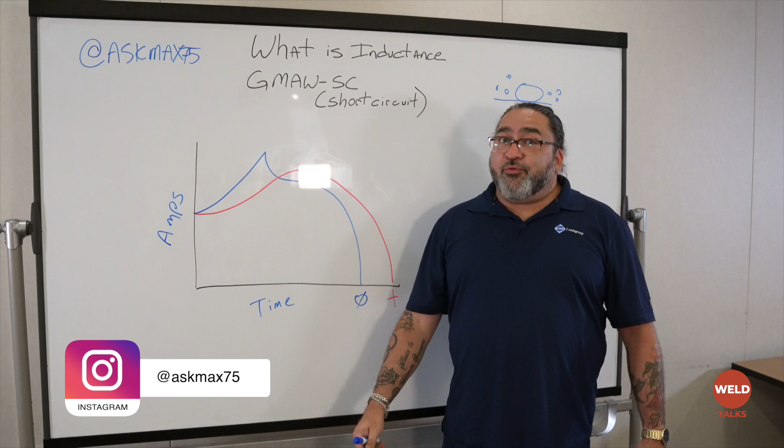We get questions here all the time, and one of the questions that we always get is, what is inductance? Now, inductance is a little dial on your machine that you may not know what it does, but it's important to really understand your machine for you, for your shop, and for your good welds.

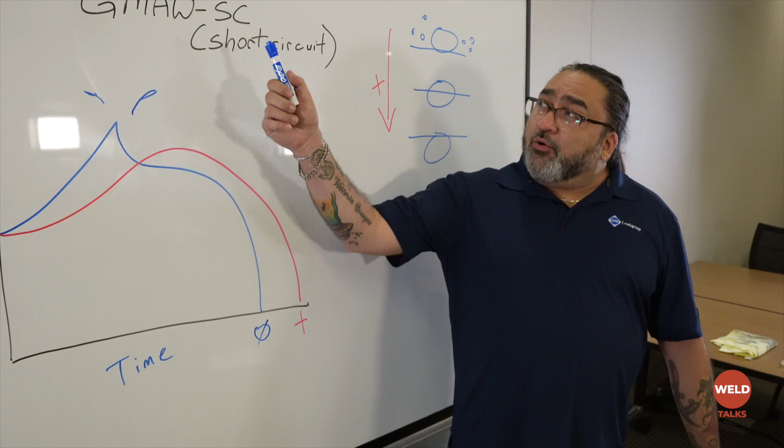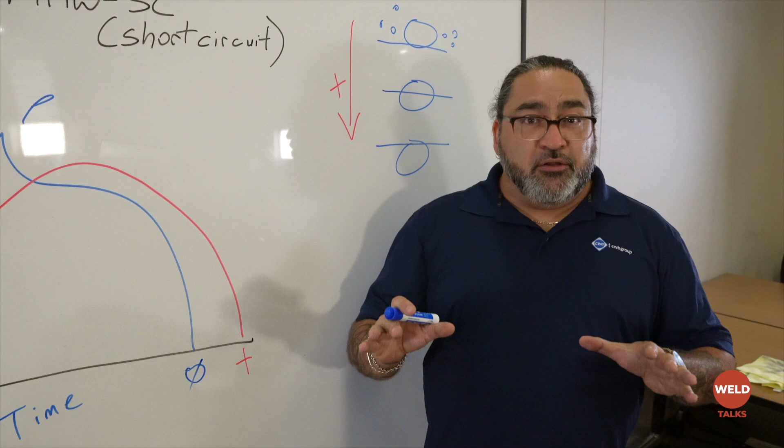Now, the important thing about inductance to know right off the top is that it only works with GMAW short circuit. So it doesn't work with globular or spray. It only works in the short circuit process, and that's when the wire is actually touching the plate, low voltage, low amperage. One of the important things to remember about inductance is that it doesn't change your primary variables. So that's your amperage and your voltage.

Often people think that if I start playing with the knobs on my machine, it's going to change my weld. It's not that drastic. What's happening with inductance is that it's going to change the dynamics of your weld over time during the short circuit process.

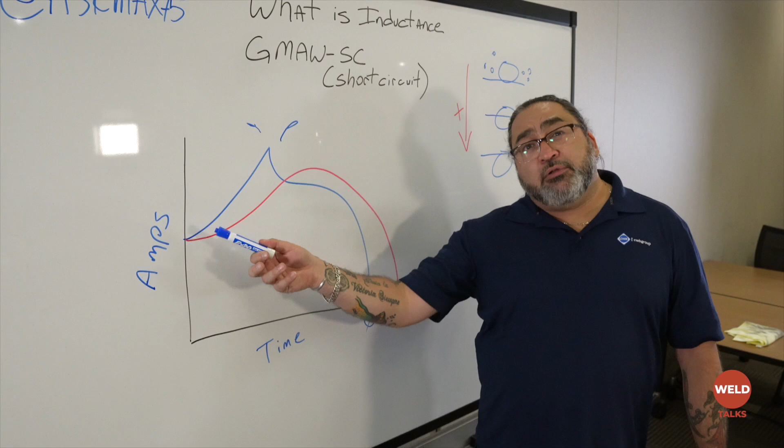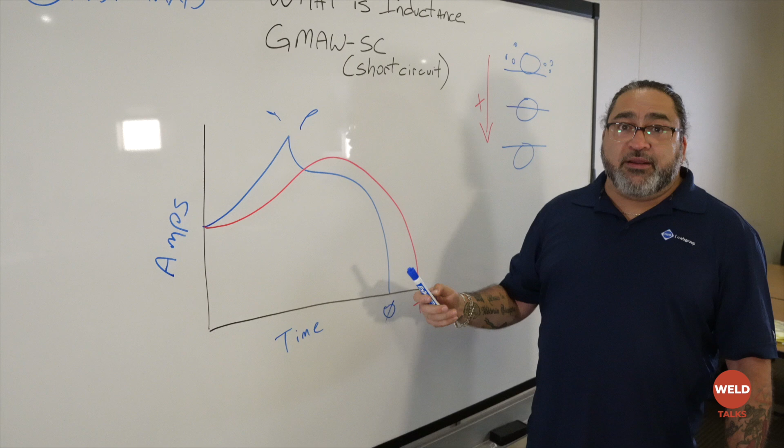Now, as we go through this, you're going to see I have a little diagram here where it explains how short circuit works. You may have seen this in school, or you can see it online. Basically, what the blue line is showing you is that the wire comes in, touches the plate, arcs off, comes down, and resets. It'll do that over and over and over again, hundreds of times per second. Every time it does that, it drops a little droplet of material on the plate, and that's your short circuit weld.

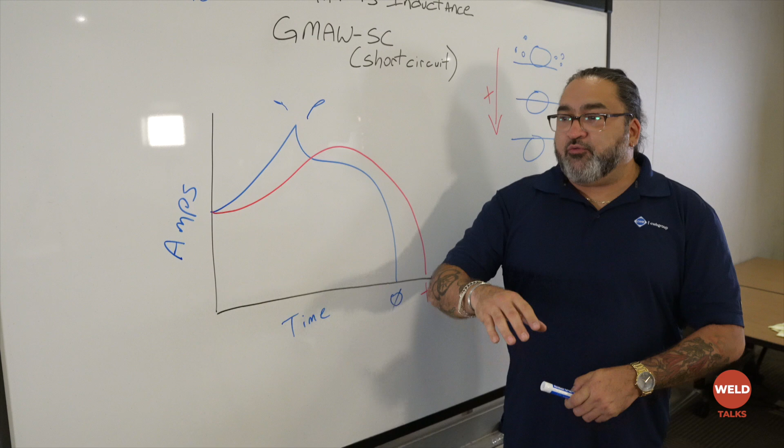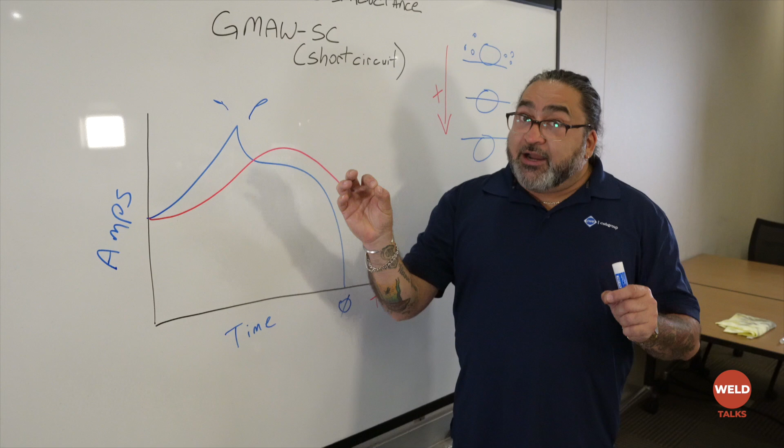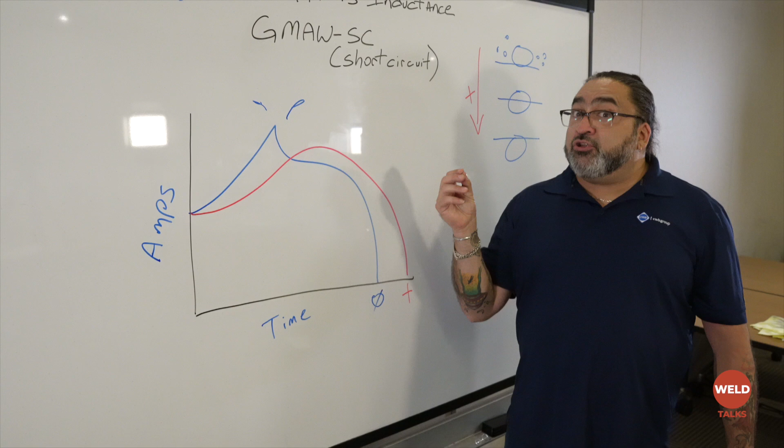Now, in the normal world of short circuit with no inductance, every time that happens, you're going to get a little bit of spatter. You don't have much control over the wire, and it sits really high on the plate. Now, inductance changes that. With that little knob, you're able to change the power dynamics of the amperage you're putting in versus the time of the weld. Now, it's important to note that this is not changing your primary variables. Your voltage and your amps stay the same.

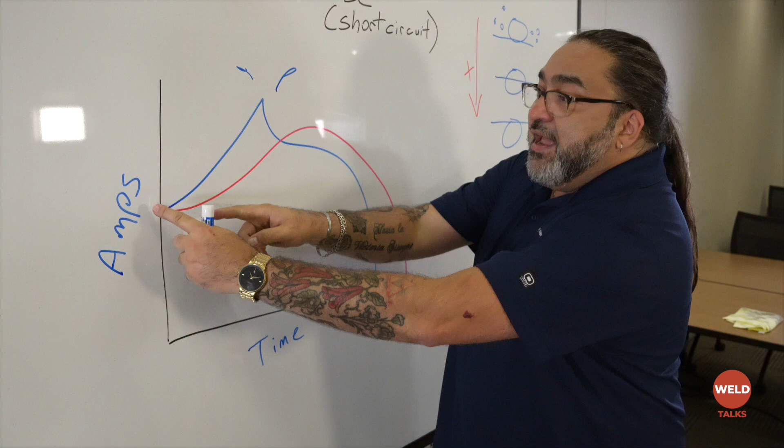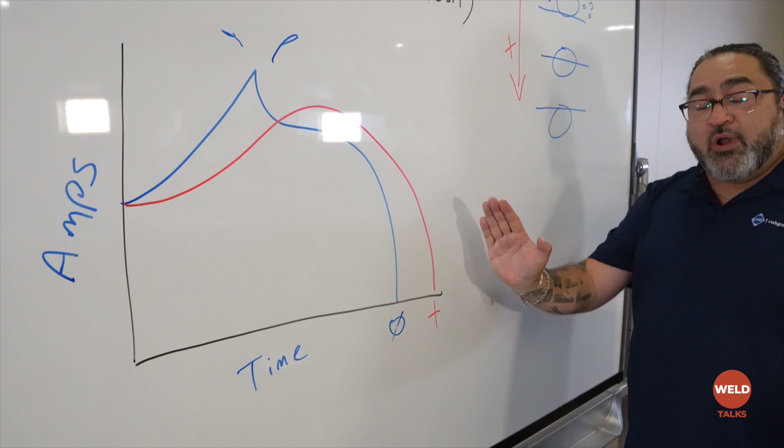So as I had it explained to me years ago, it's like tying a piece of string right at the start. You tie it here and you lay out your string, and that's your blue wave. That's your normal short circuit weld. Now, inductance is like taking that string and moving it up. And by dragging that string across, I pull down the curve and extend the weld time, the heat time. Now, the voltage and the amperage haven't changed, but I have changed the curve of how it's going in.

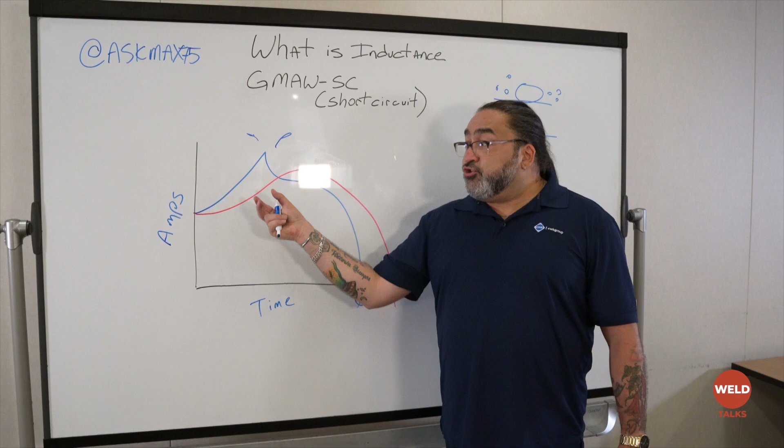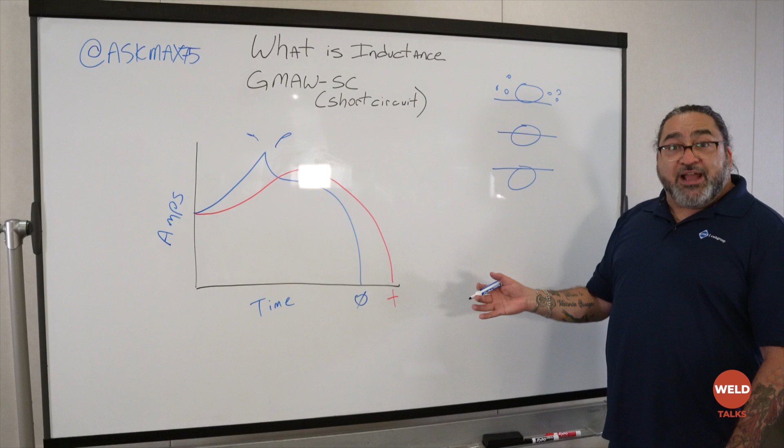As you change your inductance, it'll change where your weld goes depending on how long it sits there. So you can see over here, if I have no inductance, my weld is sitting up on top, and I'll get spatter, and the weld will do the weld. It's not any weaker or stronger, it's just where the weld is sitting. As I increase the inductance, the weld starts to penetrate a little deeper into the material. If I go full inductance, all the way to 10 or whatever setting the machine has, it'll increase it to a point where it'll be as deep as it can go without losing its voltage.